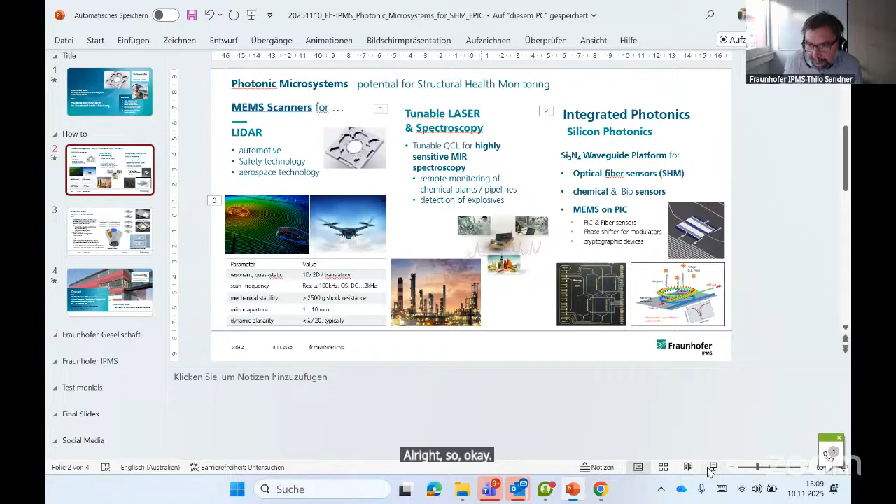In terms of photonic microsystems with potential usage for structural health monitoring, I have to mention our technologies for MEMS scanning mirrors. They are interesting for several LiDAR applications, like in automotive, safety technologies, and aerospace technologies. They are proven for reliability, especially for automotive LiDAR, and we can imagine using these fast scanning devices for several LiDAR-based safety technologies, also for structural health monitoring of industrial plants, buildings, bridges, and similar structures. For the MEMS scanning mirrors, we have a wide variety of solutions, from 1D and 2D translational mirrors, resonant up to 100 kilohertz, or quasi-static, vectorial scanning up to 2 kilohertz, typically electrostatic driven, though magnetic is also possible. They are especially good for fast scanning with a large variety of parameters and especially good optical planarity. This MEMS scanner technology, besides LiDAR, is also useful for several spectroscopic applications in NIR and especially the mid-infrared spectral region. For MIR spectroscopy, I have to mention our MEMS-based tunable quantum cascade lasers, which can emit in the range from 3 to 11 micrometers, and they are especially interesting for remote monitoring of low concentrations of gases or liquids, such as remote monitoring of chemical plants, pipelines, or detection of explosives.

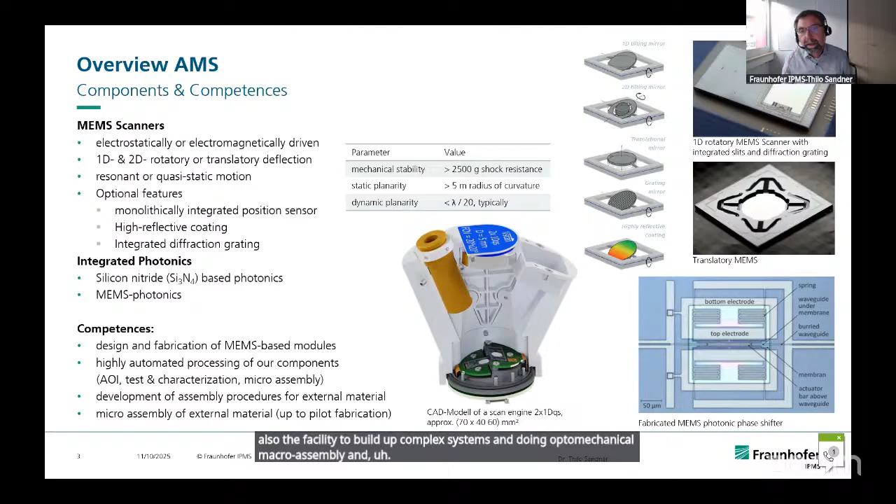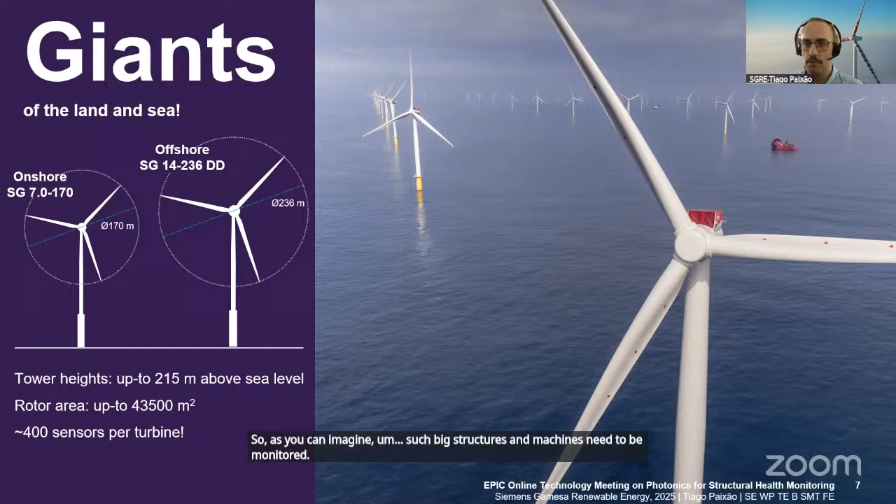On our portfolio, we have two of the biggest wind turbines in the market for both onshore and offshore. Onshore, we have the platform SG 7.0 with a rotor diameter of 170 meters. Offshore, we have the SG 14-236 DD platform, which has more than 236 meters of rotor diameter. These giants of the land and sea can have towers with heights up to 215 meters above sea level, and usually we have more than 400 sensors per turbine. So as you can imagine, such big structures and machines need to be monitored, especially their structural integrity, from manufacturing stages to operation in the field.

Based on this information, you can already anticipate why we need SHM solutions, but let me reveal a little bit more about what we do and show you some examples. Blades are one of the most exposed components on a wind turbine. They face fatigue, lightning, ice, erosion, which make them highly susceptible to failures.

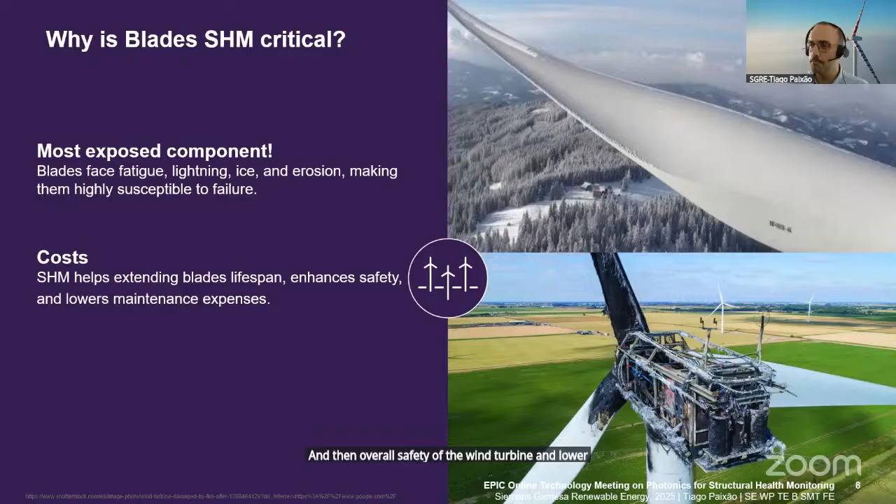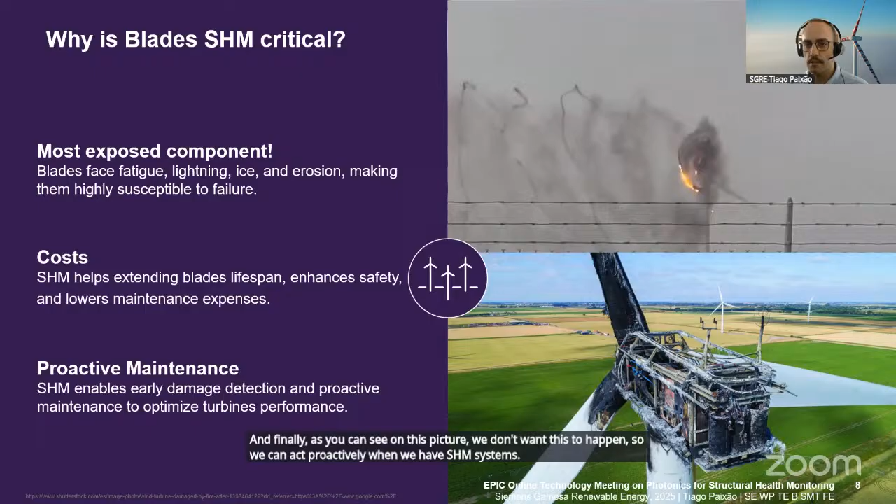Bringing SHM is really important because we can extend blade lifetime, enhance overall safety of the wind turbine, and lower costs associated with maintenance. And finally, as you can see on this picture, we don't want this to happen, so we can act proactively when we have SHM systems and detect early damages, avoiding this type of situation.

The application of SHM onto blades might look very straightforward and simple, but there are several challenges we need to overcome and mitigate before we can successfully implement SHM. We need technologies able to survive adverse conditions, as I mentioned before. UV, ice, and lightning are very important conditions that we need to survive. The integration of such systems is sometimes very complex and may compromise the structural integrity of our blades, so we need to take care of that as well.

We need to avoid electromagnetic interferences, noise, signal degradation, to have reliable data. The systems also need to be easy to maintain and inspect. Otherwise, our colleagues from service will have a very difficult task in hand, or even impossible, depending on the conditions that they face in field.

A very important aspect is also the multiplexing capabilities, because the more hardware we install inside blades, the more complex the cable routing and installation becomes. So it's very important to have systems with this feature. Finally, and probably the most important one, it's the cost. When implementing these systems at large scale, we have to have a cost-efficient system, because having hundreds or even thousands of sensors on a wind turbine or a wind farm, we have to have cost-efficient systems. Otherwise, we will have a poor business case, and we will see a lot of resistance coming from many different stakeholders.

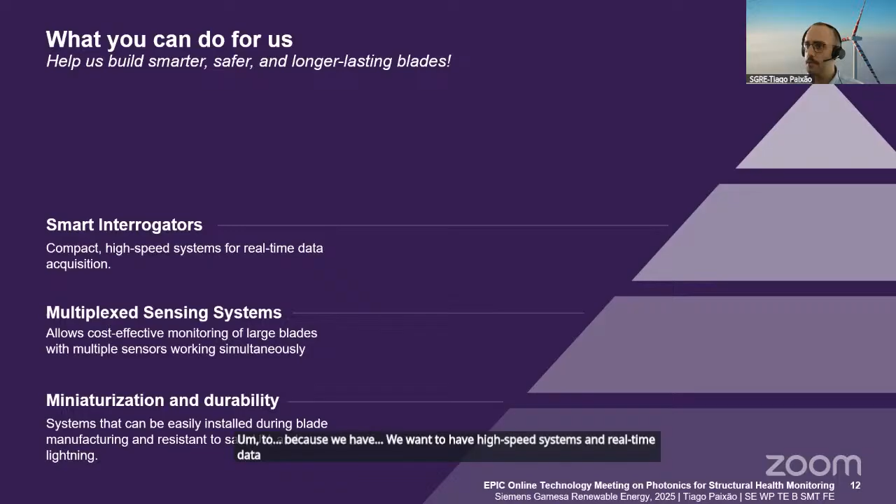And of course, following the most recent technological trends, we want systems capable of integrating AI and data fusion technologies to support integrating digital twins and AI diagnostics.

Finally, we have this question: what can Siemens Gamesa do for you? I don't know if you already know what we do, but we manufacture blades, right? And not just a few blades, we manufacture a lot of blades. So we can act as a test bed for you for SHM systems. Depending on our needs and interests, we can collaborate together. We can install many sensors on prototype blades and test them on a full-scale test rig, and validate your systems on real case scenarios.

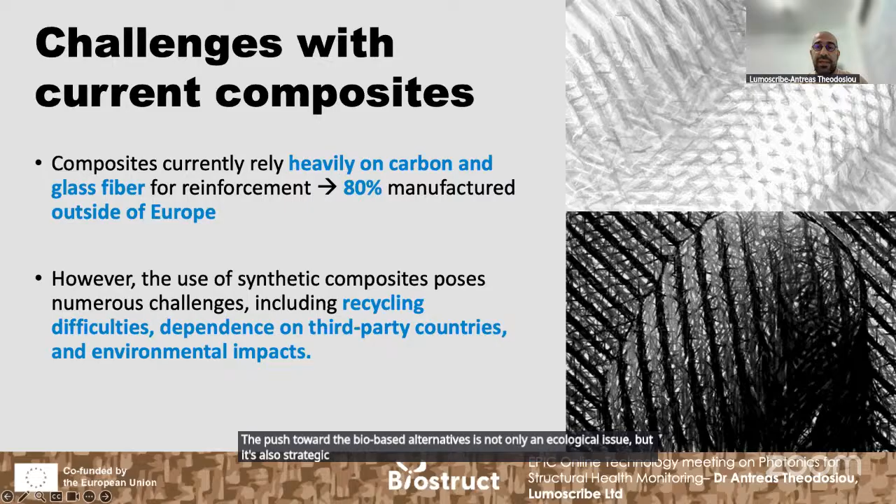So the push toward bio-based alternatives is not only an ecological issue, but it's also strategic for European manufacturing autonomy. Bio-based composites use natural fibers such as hemp and flax combined with bio-based resins. In Europe, production capacity already exists; we produce about 150,000 tons of hemp annually, and most of the flax we use is locally sourced, around 80%.

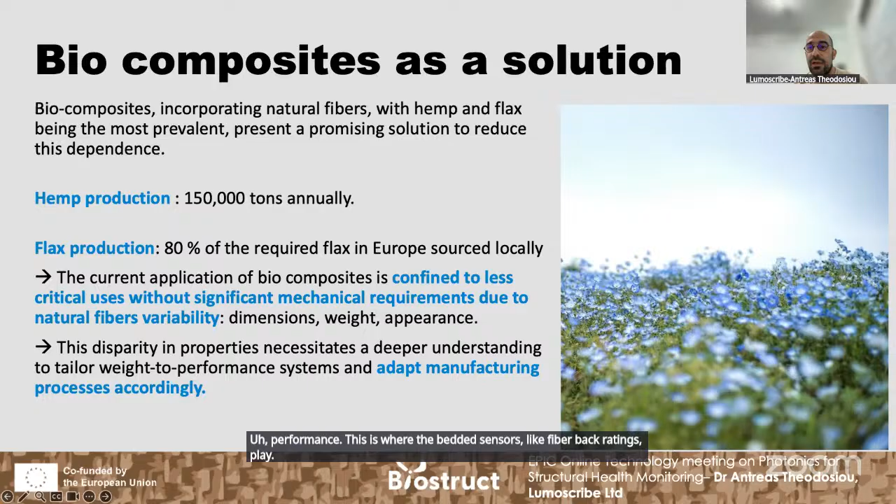However, there is a key challenge with these fibers: the natural fibers vary significantly in dimensions, density, and mechanical strength. This variability leads to inconsistent performance and limits their use in structural applications. So we need to control the draping and orientation of the fibers during layup, model the variability in mechanical properties, and monitor strain and load responses in real time to validate that performance. This is where embedded sensors like fiber Bragg gratings play a crucial role.

The BioStruct project runs from January 2024 until December 2026. There are 10 partners from 6 different countries with a total budget of around 8 million, coordinated by Profactor in Austria. The main objective of this project is to develop an accurate draping process that ensures controlled fiber alignment.

We aim to create a data-driven material model that accounts for the natural variability of hemp and flax fibers, and integrate nanostructured and bio-based sensors, including our optical fiber Bragg gratings, for real-time load monitoring. The ultimate goal is to demonstrate that biocomposites can replace synthetic ones, or at least be equivalent, in small-scale structural parts while meeting industrial reliability standards, and to automate as much as possible the overall manufacturing procedure, which at the moment is heavily human-operated.

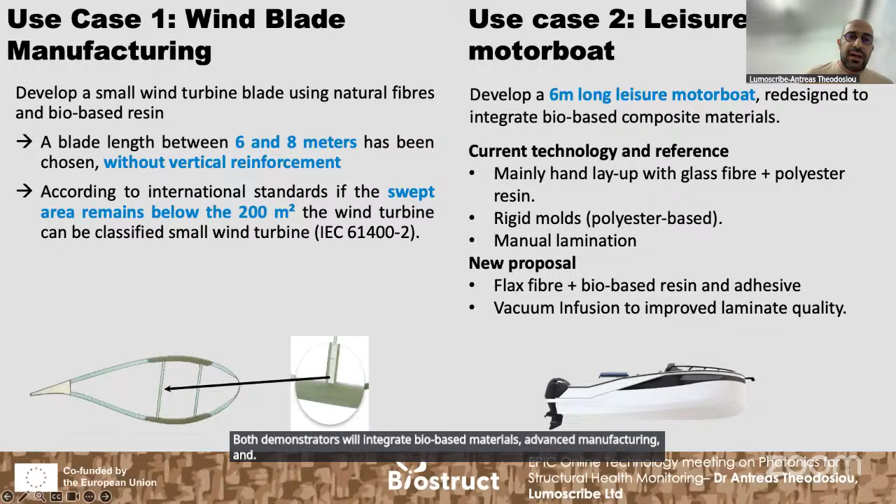So two large demonstrators are being developed under this project: the first one is a 6-to-8-meter wind turbine blade, and the second one is a 6-meter leisure boat hull. Both demonstrators will integrate bio-based materials, advanced manufacturing, and embedded sensor technologies. One of the key challenges we had at the beginning, which I believe is shared with all kinds of composites, was how to embed the fibers in the composites and maintain their integrity.

Especially the integrity of the fiber connectors after lamination, and also how to mechanically integrate the optical fibers into these materials. For these reasons, we spent a lot of time on trials and testing, and we tested different types of fibers, including ultra-thin fibers with diameters less than 60 microns. At the moment, we are in a very good place, achieving a success rate higher than 98% in manufacturing without destroying the fiber connectors.

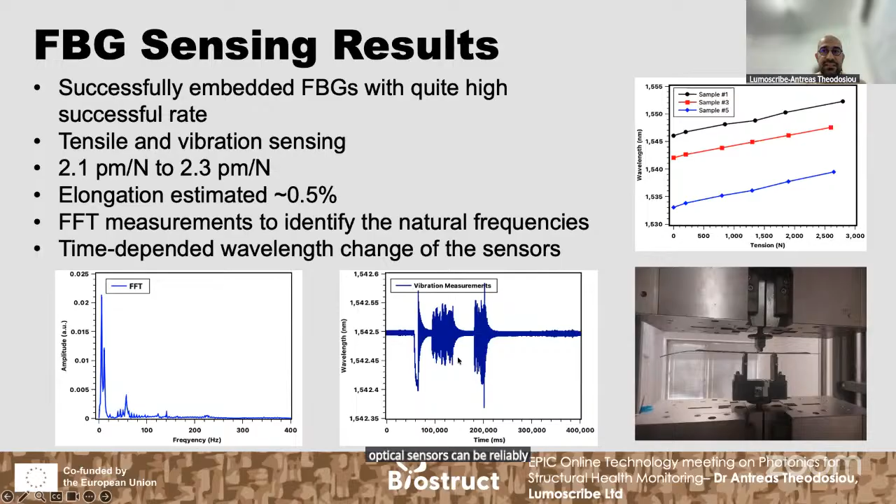From the slides, you can see the sensor responses in tensile and vibration tests. For tensile tests on different samples, we found sensitivity between 2.1 and 2.3 picometers per Newton, with total material elongation of around 0.5%. We also performed Fourier analysis with vibration of the systems to identify the natural frequency of the composite samples, and time-dependent wavelength tracking shows excellent correlation with the applied load cycles. These results confirm that the FBGs maintain signal integrity and mechanical bonding after lamination, demonstrating that optical sensors can be reliably integrated into this kind of material.

The next step of this process is our attempt, as I said before, to automate the overall manufacturing process. We are working toward automated draping using a robotic tape roller, minimizing human intervention as much as possible and ensuring the reproducibility of these composites. The process is supported by an image-based system integrated into the layup head to monitor fiber orientation and ply placement in real time.

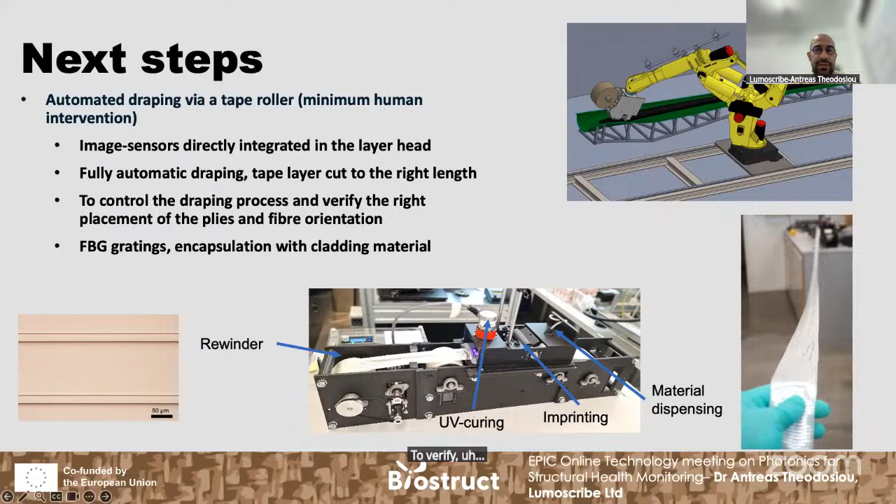Meanwhile, the fiber Bragg grating sensor, encapsulated with a protective layer, will provide in situ feedback during and after the layup to verify correct draping and detect any early mechanical anomalies.

So to conclude, the BioStruct project illustrates how photonics and biocomposites can converge to create the next generation of sustainable smart structures. By embedding these FBG sensors into the bio-based laminates, we enable continuous monitoring from production to operation, a key step toward predictive maintenance and better safety.

The next step, as I said before, is to automate the draping and sensor placement process, and to enhance reproducibility and prepare for larger scale manufacturing.

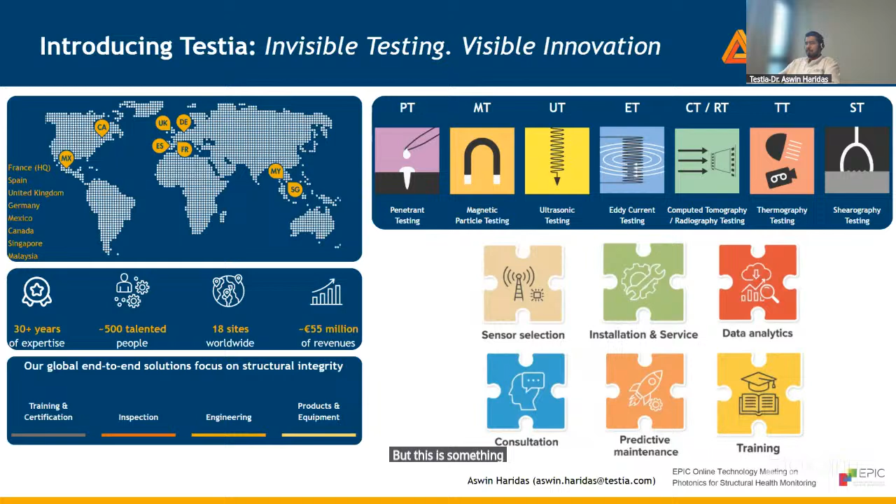I have captured 2 slides to maybe talk about some of our offerings - one quite generic from SHM.

I see a lot of names in the list of participants here who I've worked with in the past. So I guess for some people it's quite a similar slide to what you have seen before.

But one of the things we have realized over and over working with different end users is the aspect of integrated structural health monitoring. I think it was at one of the EPIC events in the past where a phrase popped up about going from plug and pray to plug and play, and I think we really resonate with that. We realize more and more end users see a need for integrating different sensing solutions to mitigate their problems, meaning one sensor doesn't solve everything.

So to generate enough information, you need some sort of integrated backend or integrated front end, depending on how you look at it. But the basic idea is for the customer to have access to integrated data as soon as possible, so that you can convert that data into information.

In a lot of our cases, when we work with customers, we realize this is something people realize at a very late stage, and there's a lot of effort needed to synchronize data. I'm sure a lot of you know this. So this is one of our key standard offerings, where we provide pre-integrated solutions, trying to integrate conventional sensing, fiber optics, MEMS sensing solutions, wireless sensor networks, piezo sensors and so on, all together so that we are generating synchronized data.

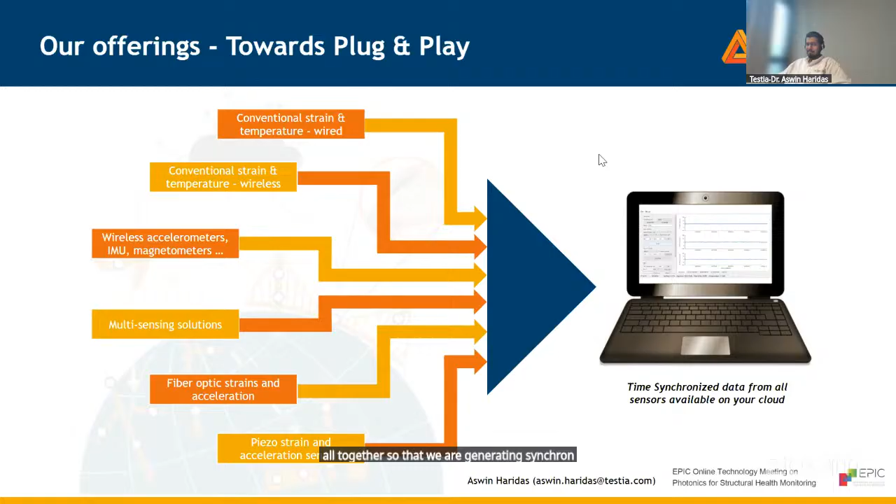So we have optimized the way we implement fibers in scale in order to meet these extremes. On the flip side, we also work with high temperature fiber use cases, which is relatively new. We have some upcoming activities looking at implementing fiber optic sensors for monitoring 1000 degrees Celsius and more for a brief period of time, and maybe even 700 degrees Celsius for long-term inspection monitoring. This is also an area where we are quite active, and I think these extremes suit us a lot.

Maybe also to mention, although we are an Airbus company, we are not only working with aerospace use cases - we have use cases outside of aerospace as well, be it wind turbines, marine, or infrastructure. Here we are also actively implementing sensors, including fiber optics, for monitoring loads and vibrations.

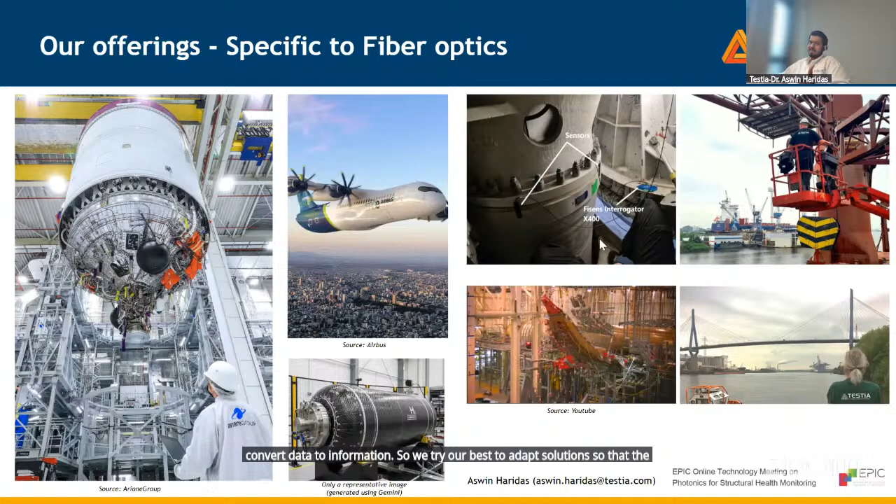These manufacturers have challenged the use of fiber optics within the manufacturing process because of the warranty they can offer, which made our end users a little bit cautious when it came to implementing fiber optics integrated into manufacturing. So having a high amount of reliability and making sure these are standardized is, I think, quite important for us. The topic of equivalence is also very important when it comes to NDT, and I guess everybody in the world of NDT speaks about probability of detection and some sort of equivalence principle when it comes to comparing different inspection methodologies.

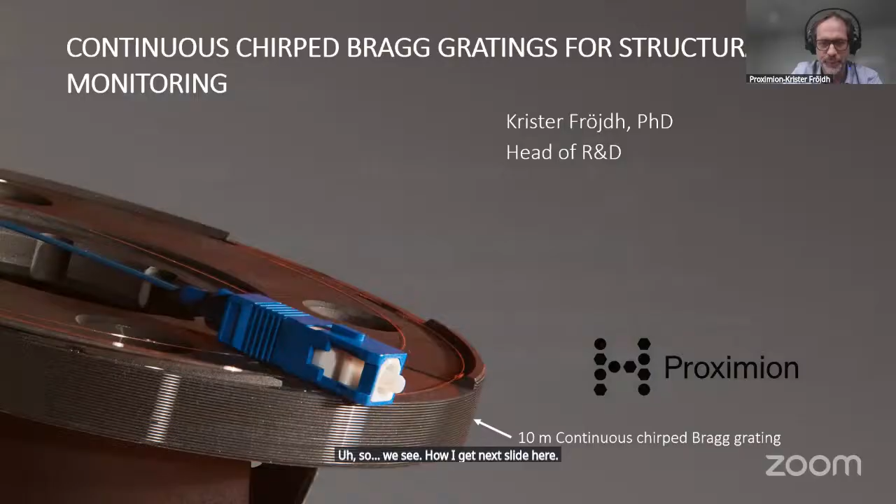Maybe you all know about Proximion, so I shouldn't say too much, but we are headquartered in Kista, north of Stockholm, and we've been around for quite a while. We started with telecom fiber Bragg gratings, and for the last 12 years we've also been working with sensing, mostly for thermal sensors but also some strain measurements. We have our own clean room where we manufacture the gratings. We've delivered around 40,000 of them, though I don't think that's actually enough. We're fully owned by the Hexatronic group, but we operate almost like our own company, quite self-controlled, though fully owned. That's good if you want secure financing.

So what is a continuous chirp Bragg grating? This is a rough picture: the Bragg wavelength changes, in this example, from a long wavelength to a short wavelength. This is used in a product we sell for telecom. You use this because in a telecom system you get dispersion in the fiber, which will widen your optical pulses. For 10 gigabit per second, this happens after maybe 100 kilometers. When we send the pulse in, the red part gets the short path and is reflected, but the bluer part is more delayed. In that way we can compensate for the dispersion in the fiber — that's what's called a dispersion compensation module.

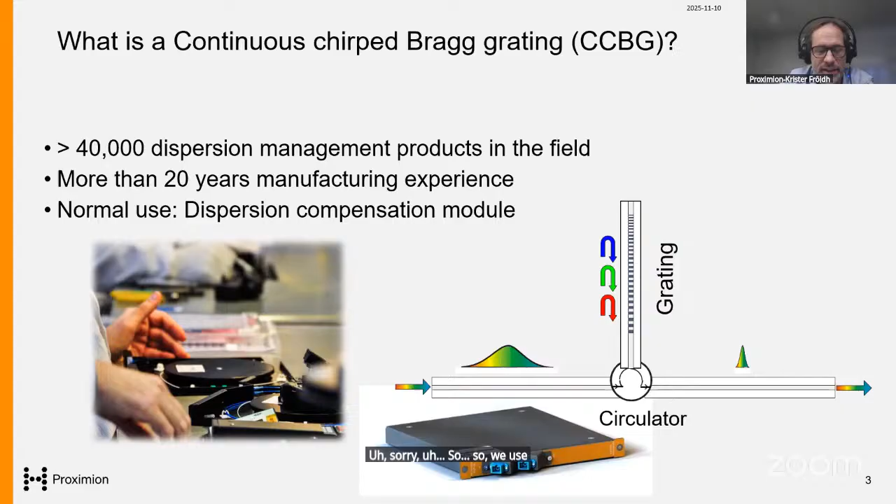So we use them for dispersion compensation, but we can also make them up to 30 meters and also very wide in wavelength. It's a bit difficult, it's a very long bragg grating. I would say most people think of maybe 5 millimeters or maybe 10 millimeters. So it's a bit special, but it's necessary to do this to have this continuous dispersion compensation.

But you can also use it as a strain or temperature sensor, and you can use a sort of interrogator. We are manufacturing an interrogator that measures the reflected spectrum, and you can also use something like an OFDR, where you actually also measure the phase response. In this case, if you can only use light intensity spectrum, that gives you a much lower cost of the interrogator, and also you are not sensitive to any disturbance along the fiber.

The phase sensitive interrogator is typically an optical frequency domain reflectometry, and then you also have an interferometer here, so this is part of the interferometer. It's a very great accurate measurement, but sensitive. It's not very robust I would say, and also quite expensive.

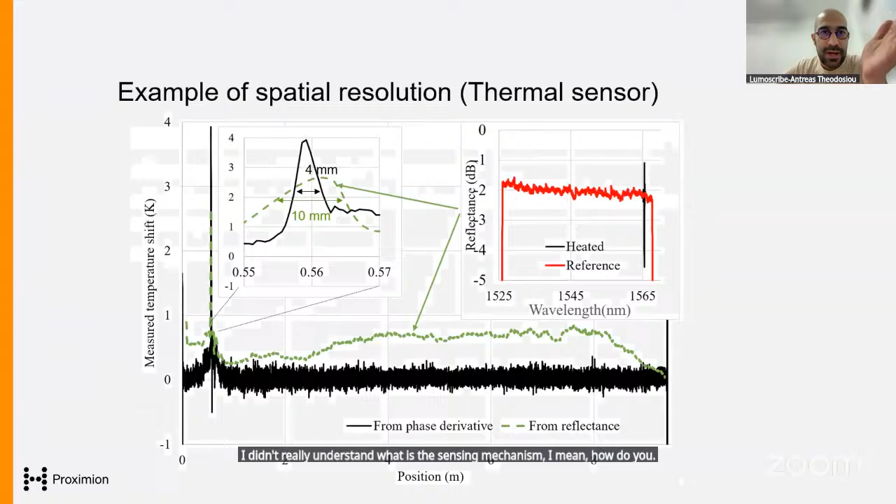Hi, very interesting presentation, and I really like this concept with chirp gratings, but I didn't really understand what is the sensing mechanism. I mean, how do you find the spatial information of the change?

Yeah, how should I put it - if you look here, no, I'm now going to point in the right picture. If you look here at the spectrum, you cannot really see the exact position. Yes.

You know exactly how the grating is written, and if you check this reference, the mathematics is shown there, how you calculate it. I didn't include it here because I'd have to remember all the details, and it would take too much time. It's a bit more complicated compared to discrete sensors to calculate the position and the strain here, but it can be done. You have to integrate up the wavelength, so it's a bit more complicated.

Okay, do you think... sorry, a follow-up question. Yeah, please, Antreas. I think you commented at some point during your presentation that the interrogation unit is much more cost effective compared to normal fiber Bragg gratings. Did I understand correctly?

My point was that you get the best result if you have a phase sensitive interrogator, but they are quite expensive, quite slow, and also very sensitive to vibrations. If you're using this in a lab environment that's okay, but in a real environment you typically have a lot of vibrations that tend to disturb this sort of interrogator. But if you just look at the spectrum, you can use a more standard interrogator that just looks at the reflected intensity of the reflected light, and those are cheaper, much faster, and also much more robust.

The most common way is to include both a strain and a temperature sensor. But it somewhat depends—sometimes you have almost the same temperature on the whole structure, so you can just use a discrete temperature sensor. But we don't have any way to simultaneously read out the strain and temperature from the same fiber.

So you have to use two in parallel, one free from strain. Yeah, that's correct—that is one of the challenges, having a long fiber free from strain. We have a lot of those, so I think we're quite successful, and I'm not that worried about that.

Okay, good, thanks. Any other question? Yeah, Ashwin. Thanks once again, very interesting. Just curious about the bending performance of such fibers or with these gratings. Is there loss due to bending? Is this something that you have characterized?

Of course, if you have micro bending, that could be a problem. This is quite a small core—typically the fiber is not that bend sensitive. So we haven't seen that as a problem, but I'd also say this was just a demonstration and it works nicely here. If you integrate this into, for instance, some composite, I can't promise anything more, but the fibers are quite well guided, so I don't expect the losses to be too much.

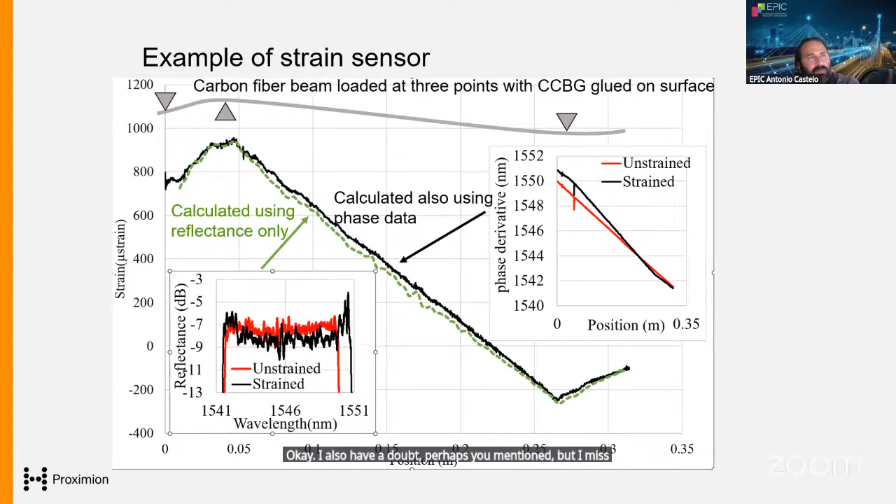Okay, thank you. Okay, I also have a doubt—perhaps you mentioned it but I missed it—about the use of this as a thermal sensor. When there is a variation in the temperature, does it mean you have a change in the amplitude of the signal, or is there also a change in the width you mentioned, the 4 millimeters?

Yeah, if you look here, this is the optical spectrum. When you heat it, you get this very local shift with increased and decreased reflectance, because a small part of the grating will shift to longer wavelengths, increasing the reflectance for one part and decreasing it for another. That's why you see this peak in the spectrum, and from this you can calculate the green curve.

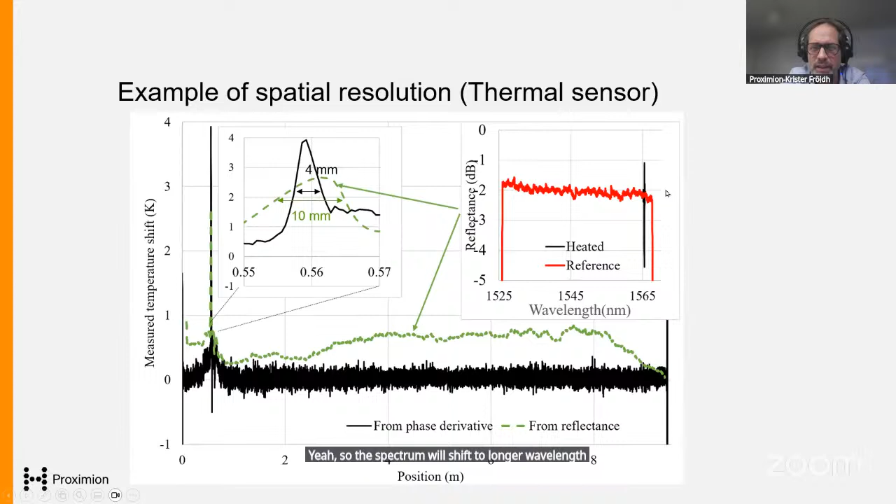Did you test reflectance at different temperatures to see the difference in the signal received back? We do a lot of temperature testing—all our products are temperature cycled—but the only thing that happens is that you get a shift of the spectrum. The spectrum shifts to longer wavelength, typically around 11 picometers per Kelvin. Otherwise, we don't see anything else happening.

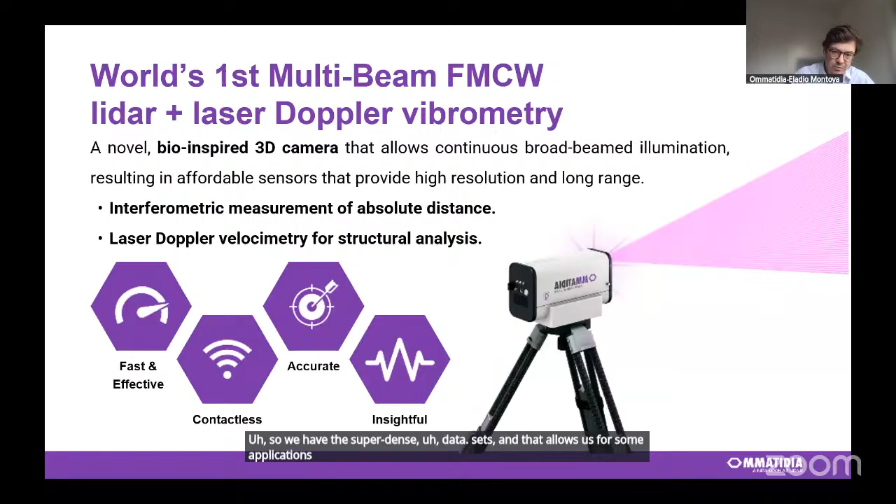The core of our instrument is this chip. Instead of having just one interferometer in the sensor head, we have 64 or 128 interferometers in this photonic chip, which is 1 centimeter from side to side. This is our core knowledge and the ground for a couple of international patents, and it makes the instrument very robust, very insensitive to temperature changes and harsh environments, very compact and easy to use.

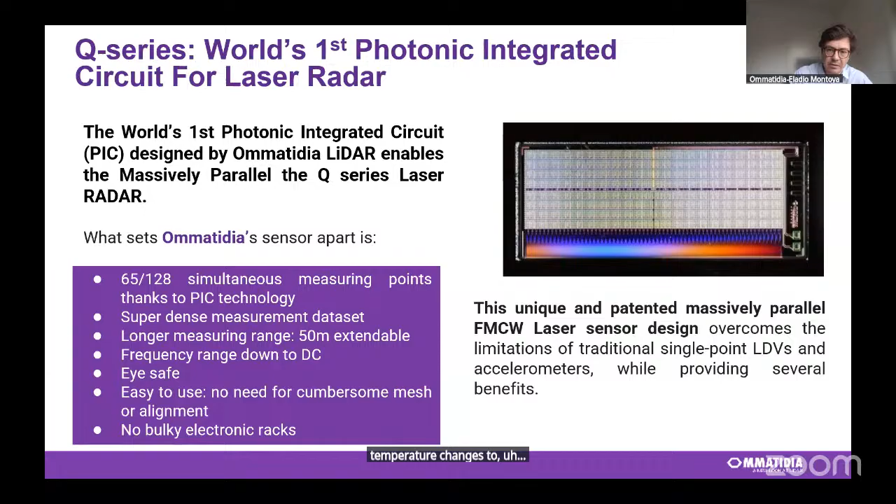From the phase shift between the laser we emit and the light reflected on the surface, we can extract two important pieces of information: the absolute distance, and the vibration frequency, based on the velocity.

This instrument becomes more interesting mainly when the object you're measuring is difficult to access, because you don't have elevation means or don't want to use them; because it's small and you don't want to add mass; because it's clean and you don't want to contaminate it, or it's contaminated and you don't want to touch it; when it's cold or hot and you don't want to stick anything; when it's at high voltage, same thing; when it's a critical piece of equipment and you don't want to stop it to install strain gauges or accelerometers; when you need so many measuring points that it becomes impractical to use contact sensors; or when you're studying living organisms or pieces of art that you cannot touch.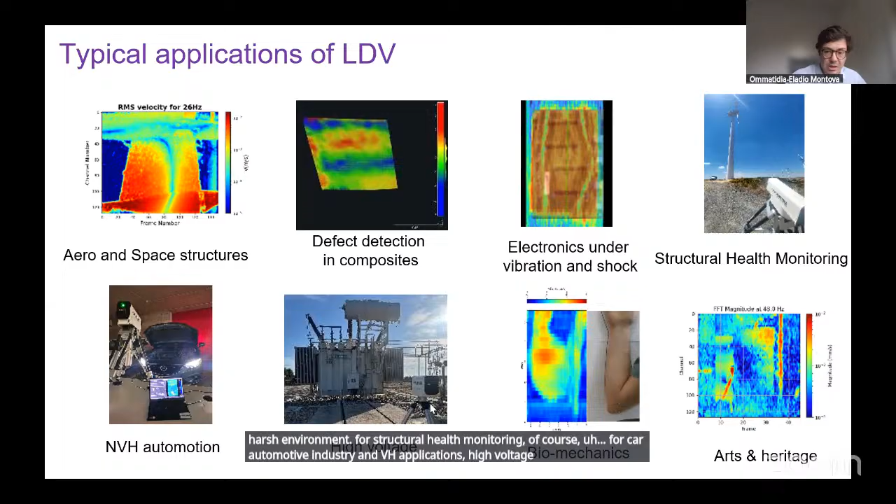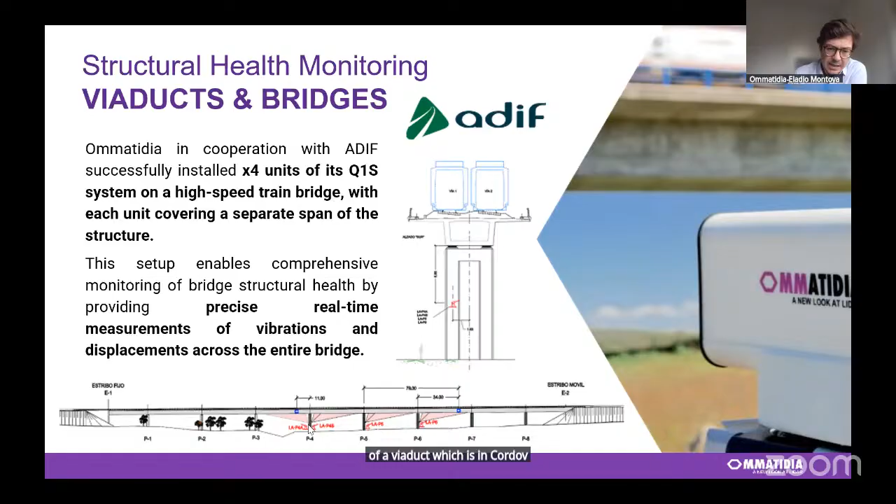So this project was about SHM in viaducts, funded by Adif, the owner of the Spanish high-speed railways—not the trains, just the railways. What we proposed was to install 4 of our sensor heads on the pillars of a viaduct in Córdoba, looking towards the lower part of the deck.

The consortium we built took care of different things. We took care of the sensor head. Destia took care of the communications of the data to a server, and Ines Ingenieros took charge of the powering electronics. We placed an optical trigger 1 kilometer before and 1 kilometer after the train passes, so that we could save power. And the Universidad Politécnica de Madrid was in charge of the modeling.

These are the sensors hanging on the pillars of the bridge, looking towards the deck. We painted the lower parts of the deck with a strip of road paint containing glass beads to increase reflectivity of the laser, mainly at the last points, because the angle was so small.

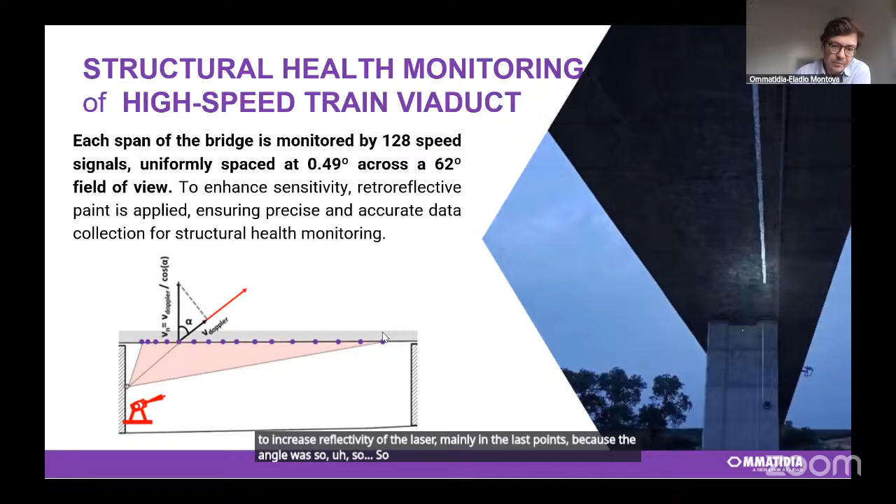First of all, we protected it from birds, which is something important.

Then we started collecting data, and we saw some coherent patterns. When you measure trains passing at the same hour of the day, you get the same data because the trains are configured the same way. When you measure trains at different hours on the same day, you get different spectra because the trains are configured differently—different number of wagons, and the locomotives placed in different positions.

We then compared our data with accelerometers, since the viaduct was also instrumented with them. Here in purple you see our data, and in black the accelerometer data. The fit between both is quite good, except for this first one—we later found that the accelerometer wasn't correctly attached.

We also calculated and measured the real-time deflection of the central point of the deck on one of the spans as the train passes. Since it's a hyperstatic bridge, we see this kind of behavior.

Before the train passes, the deck moves up, then down, then up again, and down again. The Universidad Politécnica de Madrid calculated this behavior, and we measured it—we got very similar results, even reproducing this kind of noise, which isn't really noise.

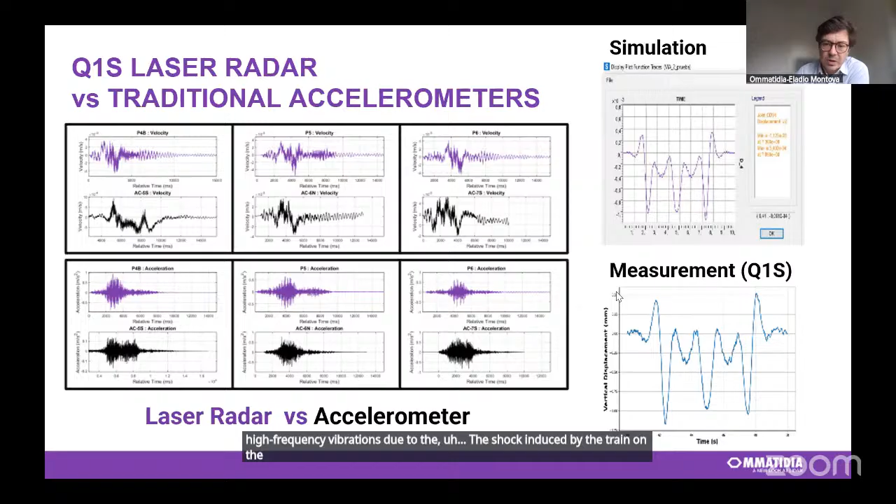Some other projects we're working on: for example, for the City Hall of Amsterdam, they want to know if the quays are being damaged. The quay isn't really like a river; it's more like an open duct. The walls of the quay deck could leak, collapse, or move, so they have a service of people inspecting this day by day.

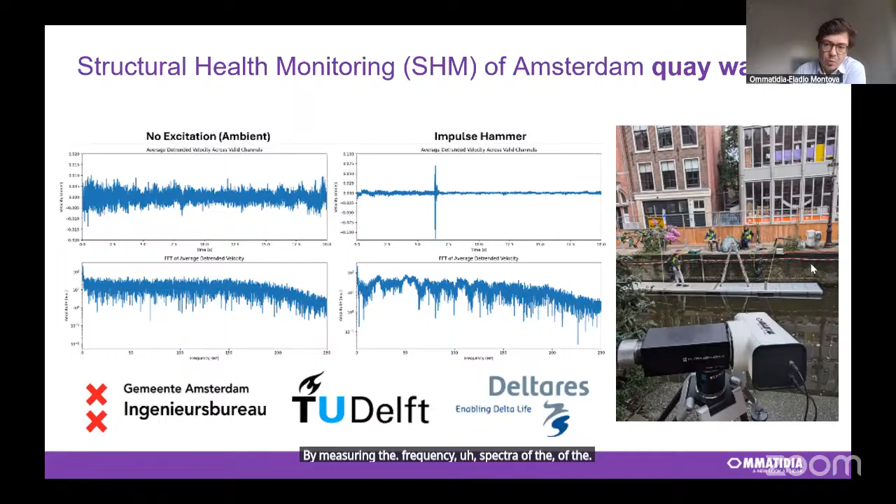What we propose is to install our instruments on top of a car and greatly increase the productivity of this kind of inspection by measuring the frequency spectra of the quay walls. There are many more applications we can think of.

For example, about two weeks ago there was news in Spain saying that a third of the dams in Spain could be damaged and require technologies to monitor them in real time.

Also applications in arts and heritage, gas ducts, and power plants. So there are many open possibilities that exist. Thank you very much, and I think this is all from my side.

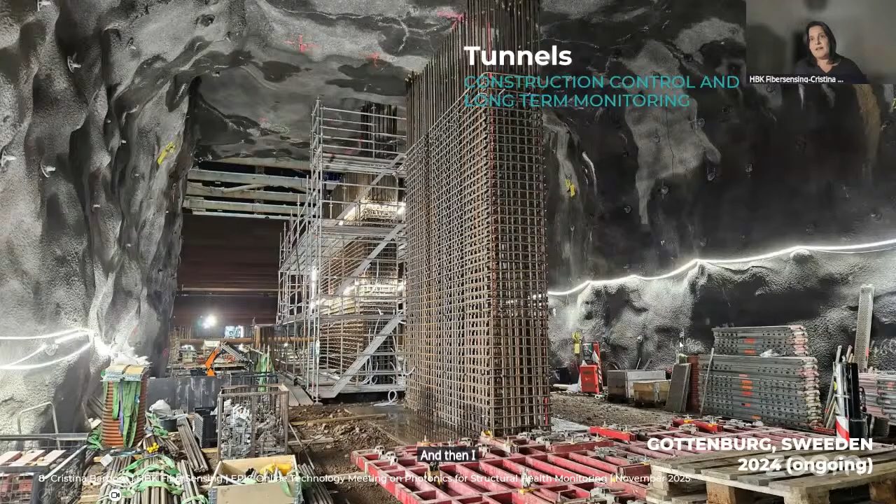And there's immunity to electromagnetic and radio frequency interferences, which is one of the challenges we see in many applications. I would like to share our experience and some projects where we have been involved in different areas, in civil engineering and in wind energy. We will go over them.

So I start with this example. This is a tunnel under construction in Sweden. It's an ongoing construction where they are excavating the rock mass, building massive pillars that will support the gallery of a station. After the pillars are built, they will blast the rock walls, and the pillars will hold the ceiling of the station. This whole construction process had to be controlled and monitored in detail.

We delivered and installed strain sensors to be embedded on the pillars or spot welded to the metallic rebars, and of course temperature sensors as well, to make sure we have stable and temperature-compensated measurements, with everything acquired by our optical interrogators. In this case, we have an MXFS that is part of the QuantumX platform, transverse to the HBK portfolio.

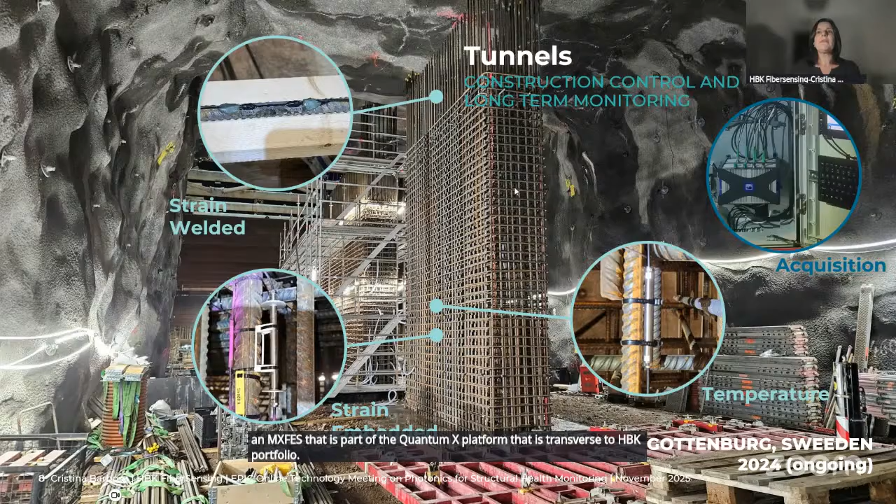Another interesting example for structural health monitoring systems are bridges. For long-term monitoring, most of the time, but bridges also have a lot of load tests, which is not so common with the optical technology because we would not be taking most of the advantage out of the technology.

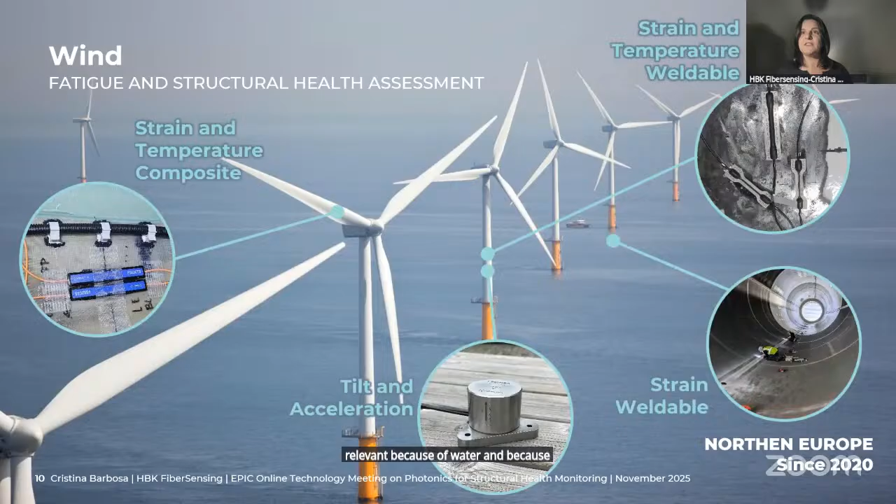Another interesting application for optical fibers is wind, not only offshore but also onshore. Nonetheless, offshore is quite relevant because of water and because of the resistance of the sensors, since silica does not corrode. So that's quite an interesting technology for this.

Here we can address the different levels of the turbines, from the foundations, the tower, to the blades, where we have sensors on the blades, for example composite sensors designed for high fatigue and high strain measurements. On the foundations, we have a lot of applications on monopiles, where the fiber Bragg grating sensors tend to have a very interesting survival rate during installation. We are talking about big structures piled on the seabed, a very harsh process, and we have had very good results here, also on the towers, with different measurements: strain, temperature, as well as acceleration or tilt.

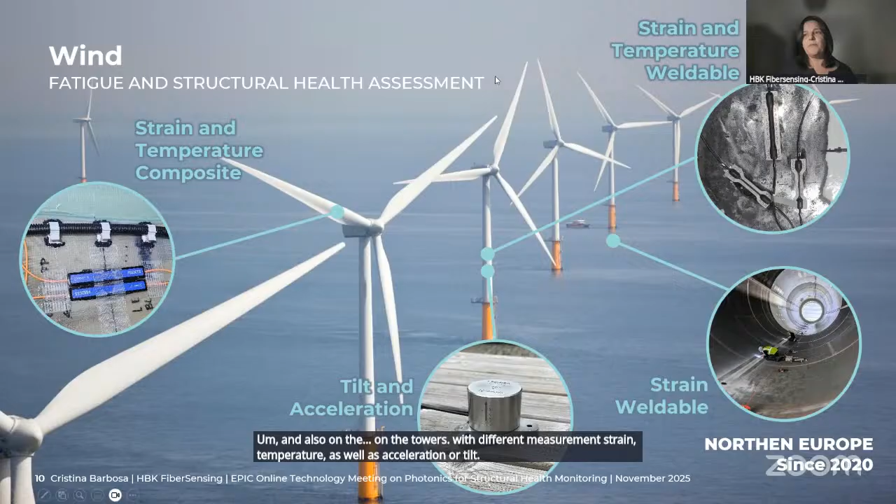Most of these applications I cannot disclose. This is an example, similar to the next one, but nonetheless I think they are important to show the different types of structures we can monitor. We can also monitor buildings or special structures. This one is an offshore platform, and the purpose was long-term monitoring. I cannot disclose much further, but we were measuring tilt, so inclination towards the vertical, as well as vibrations on the structure.

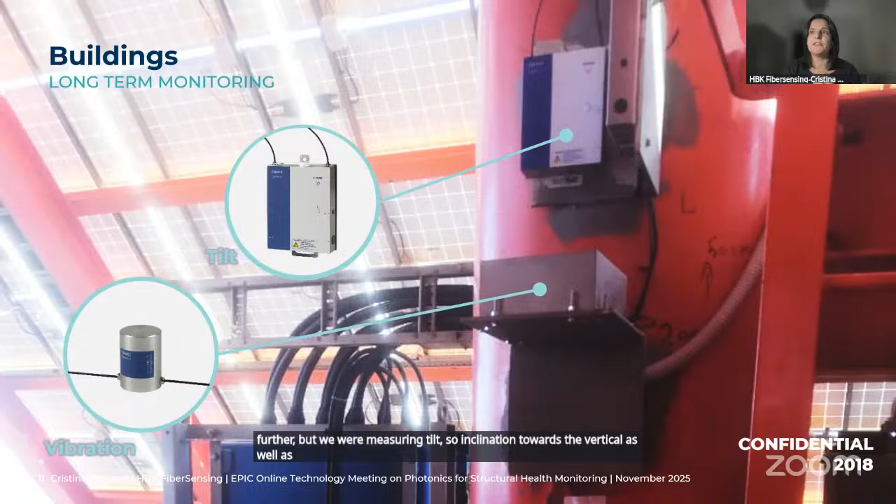Another example are pipelines. Again, long structures, remote. It makes sense to have the sensors in arrays along the same line of linear structures, so the technology fits well. In this case, we normally measure strain and temperature, always for temperature compensation. I show here a picture of just the fiber with some PEEK coating for robustness, but weldable sensors or composite sensors can also be used, attached to the surface.

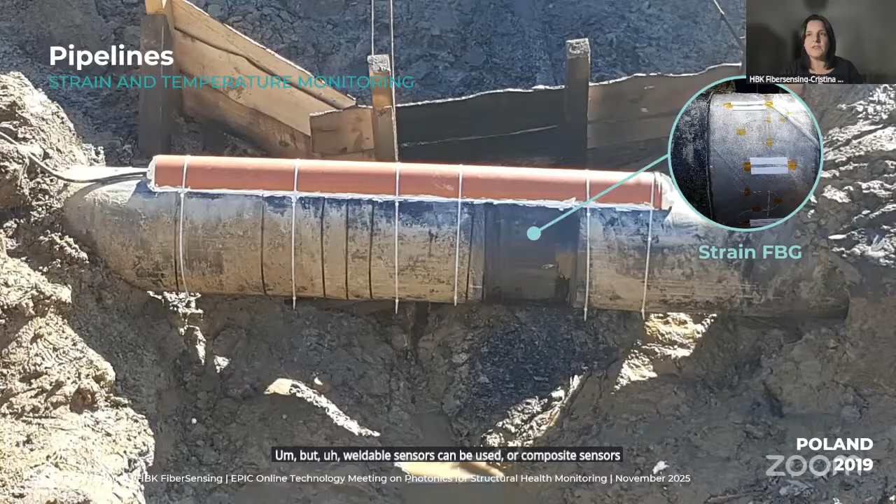Another interesting example, more on the mobile structure side, could be the monitoring of ship hulls. Again, we have some examples of application here. Some of them are in the defense area, so we cannot disclose much, and honestly we don't know much about the application ourselves—we just know what they are for. Here we can use sensors embedded in the structure or glued to the surface. But most of the time, we are talking about strain and temperature being measured on the ship hulls. This is the type of measurement we normally take.

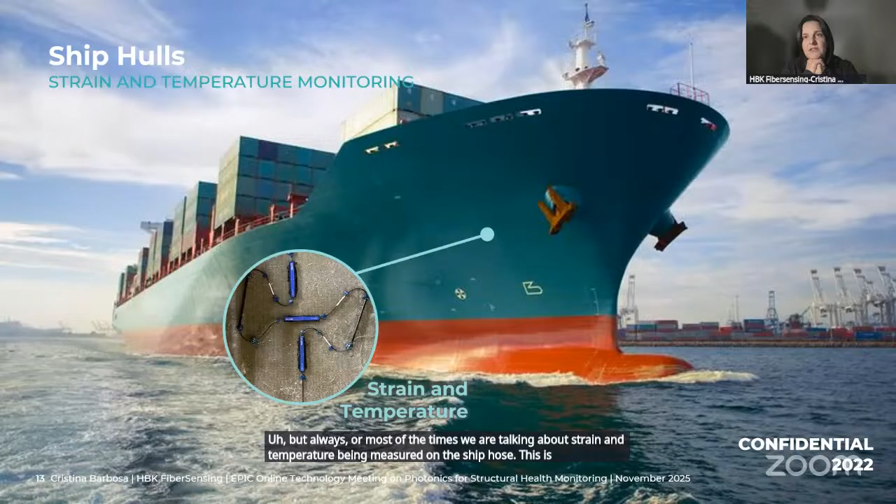Just to wrap up, we do see a continuous increase in interest for structural health monitoring on many different structures. We saw here today mostly a focus on composite structures, with a lot of embedded technology. But for other types of structures too, this is gaining interest. The technology becomes interesting as a problem solver for some issues, as we saw today.

So I went through the benefits of the technology, and this is where it makes sense to use them. Also interesting is the fact that HBK can deliver a modular solution—just the sensors, or a complete solution including software or not, depending on the needs of the customer. Another very interesting characteristic of our company is that we can combine technologies. As we heard today, it's quite important that we can create the most complex, complete system using different technologies. So I'll close by letting you know I'm available if you have any questions, if you think HBK can support you on your structural systems, or if you think you can support us in improving our portfolio. I think all these meetings are very important for that.